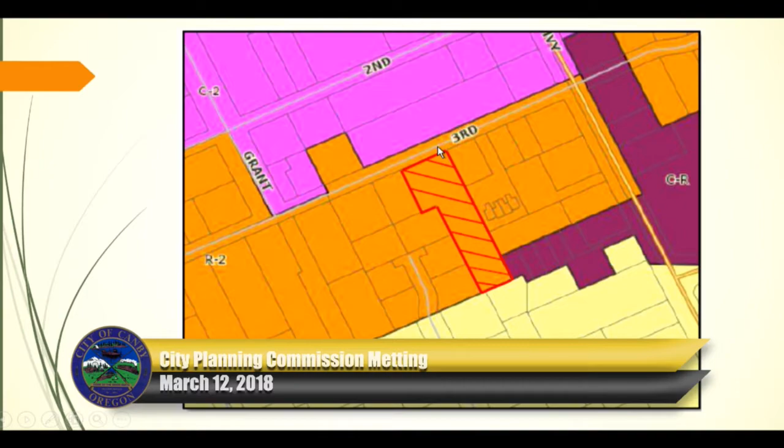This shows the location of the property in the red hatched area. It's 0.74 acres, has frontage on Southwest 3rd Avenue. It's just a short distance, 350 feet or so, from South Ivy Street. The property has a home existing at the front of the property, and so the intent is to develop this R2 zoned property with a higher intensity of use by partitioning off the house.

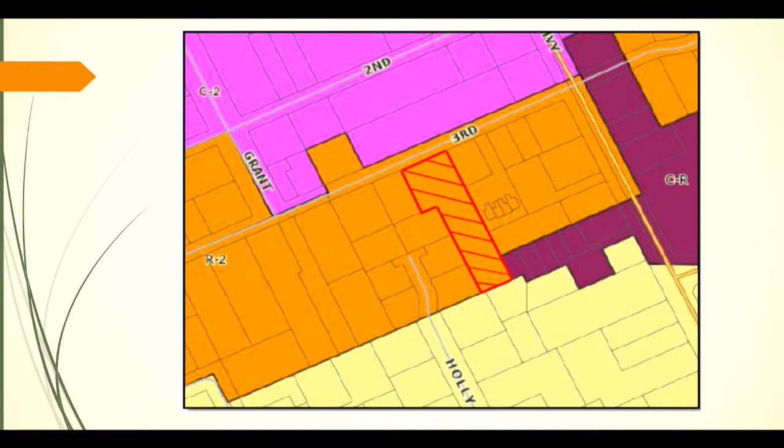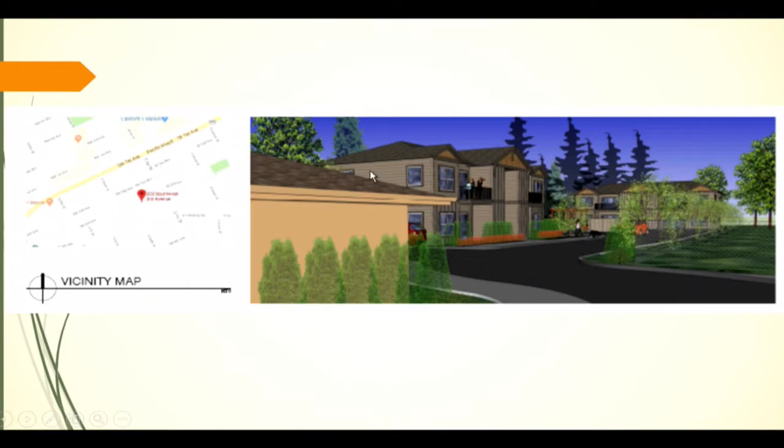Here's a picture of what it's going to look like, but you can see the existing house in the front part here that's showing up. And in the back, there are to be 2 buildings, each a fourplex. I think the front building—I don't remember now—the front building has 1-bedroom apartments and the back building is 2 bedrooms, possibly vice versa. I don't remember now.

They have a total of 13 parking spaces, that's 1 parking space for each bedroom. So you have 4 units in one building, and then 8 units or 8 bedrooms in the other, so there's 12 bedrooms. And then they have 1 visitor parking space, and one of those parking spaces is a designated handicapped space. That is the very minimum ordinance requirement, and so they do meet our ordinance.

It was indicated in the letter from Jennifer Driscoll that they're concerned about the possibility of a lack of parking.

I had a visit with the applicant, because just across the street is the Zoar Lutheran Church parking lot. And over many years, 30 or 40 years, they've actually allowed some of the commercial businesses along Ivy Street to park in part of their parking lot. So it's possible they might make an arrangement with this apartment complex, if need be, to allow some parking in the evenings in their parking lot when it's not being fully utilized.

We have some other evidence that in the evenings the parking along 3rd Avenue is pretty darn tight just from the existing residents that live up and down this street. And so if there are more visitors than we expect, or occupants in these units with more cars than our minimum ordinance requirement, then we always have the fear that they're going to park along the private road and therefore block fire and emergency access.

Reviewing the staff report, you'll find that they've gone through our residential multifamily design matrix, where there are choices for gaining points to help assure a quality development, and staff is satisfied that they've met that point requirement. They've also met the landscaping requirements for the site, and as I mentioned, the fire and trash access and parking are all taken care of.

In the minor partition itself, we do have a standard. This is another concern voiced by the Driscolls, that with this access easement and the sidewalk and the drive going so close to the corner of this existing house, that makes it less desirable than some might think. We do have an ordinance standard that says when you have an existing house and you're trying to work a flag lot to get back behind it to develop it and keep the house intact, your access road should be a minimum of 5 feet from the wall of the house.

And they do have a dimension on this particular map indicating they're 7 foot from the wall to this property line. It's a little less certain how far it is from the corner of this house to the edge of the sidewalk. The ordinance actually says from the edge of the wall of the house to the edge of the drive should be at least 5 feet. It does certainly look like it's at least 5 foot to staff, but it's a close distance.

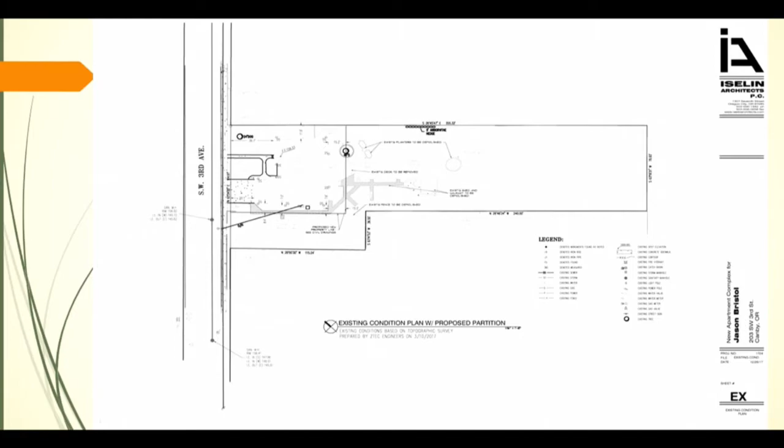Staff did recommend approval of this partition and the associated design review for the 2 quadruplexes, I guess, that are proposed as apartments. And a couple of unique provisions came from the city engineer, 1 through E, listed here.

And we have made one change in the recommendation of condition 1E, by removing a word. I should better look that up here. Removing one word, I think... where is that? Oh, I think I've already removed that from this particular version. I think it's in your... yeah, so it's been removed from the version that I have on the slide here. That's why it confused me.

So on the last sentence of condition E, in your packet, this says overflow route may be required, and we're removing the word 'route.' That was suggested by the applicant's engineer. He explained how drainage plans and standard terminology works, and in this particular case, 'route' was a little too specific to allow them the freedom, given the nature of this site and its drainage, for him to believe he's complying with that. So it leaves the flexibility to take that word out, and we did that. It wasn't harmful, and we checked with our city engineer, who had no problem with doing that.

So I just wanted to let you know that, and we made that change already to our findings that are on tonight's agenda as well.

So basically, you've got the existing driveways needing to be retrofitted for ADA. There's a requirement for commercial thickness to an apartment complex on that driveway, connection with the public street. That's what number A indicates.

They're talking about in C, a relocation of an existing power pole that's going to be needed, and extending the sanitary sewer from a manhole on 3rd into the site.

On condition number 2, we talk about a need, because currently there were no bicycle spaces indicated on the site plan. There's been some discussion about them hanging from the porches. The applicant will satisfy that requirement and it will be a condition of approval that he provides 8 different bike parking spaces in some manner on the site.

We actually did a triplex development on Township Road not too long ago. It started out as 2 triplexes, but ended up a duplex and a triplex. They ended up putting their bike parking spaces in the garages on those units, because they had garages, and we allowed them to do that in that case. A little unusual, but it wasn't really an apartment complex as such. Since they had their own individual garages, we felt that was appropriate to handle in that situation.

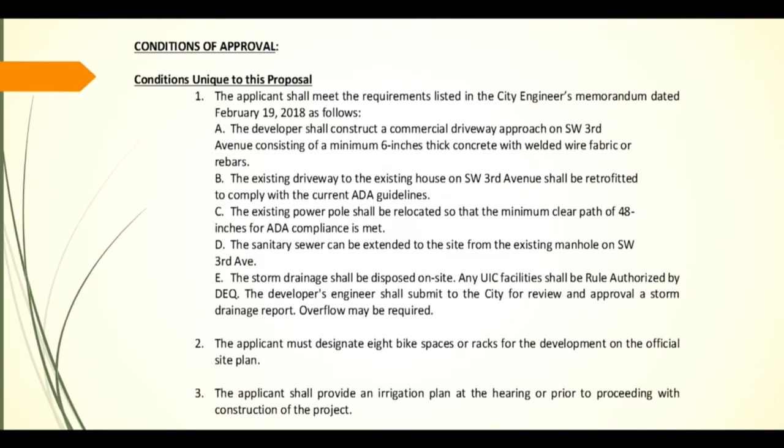We indicated a need on condition 3 for an irrigation plan prior to construction of the project. Staff doesn't actually review the irrigation plans, but we have to review that there is absolute certainty that one will be provided.

That's condition 10 that I was talking about. It's worded openly to make sure that parcel 1 provides an access easement for the road and sidewalk across the southwest corner of it, and to make sure that easement gets shown on the partition plat when it's filed of record.

So with that, again, we recommended approval of this particular application. Do you have any questions?

I've got a couple questions. So Brian, what we're approving today—they still have to come back, right? This is more like approving a concept plan, correct?

No, this is— the next step after this is for them to file a partition plat, and to do that they will file a final plat application with us. That partition plat will be filed of record to make the two separate parcels, and then they will be developing their construction plan set, which will be the final layout for the site. It must follow this preliminary site very closely.

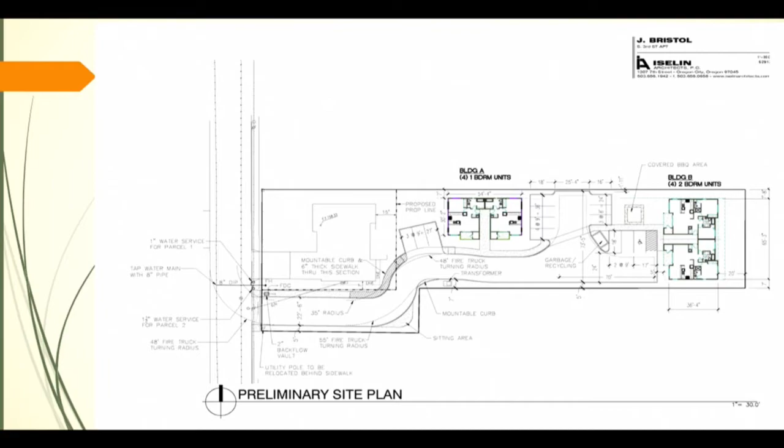This is what you will face when you're trying to develop an area that's otherwise inaccessible by keeping an existing home. Your alternative is to tear the home down, so you don't have this particular situation.

Any other questions? Okay, proponent?

Good evening, I'm Pat Sisul with Sisul Engineering, 375 Portland Avenue, Gladstone. I'll go ahead and introduce Jason as well. Jason Bristol, 21733 South Highway 99E, Canby.

I wanted to begin by discussing the fire truck turning radii. If you look at that plan, there's one turning radius that is 48-foot outside and 28-foot inside. That's the one farther to the right, labeled 48-foot fire truck turning radius—that's a minimum. The other one, where the radius goes up over the sidewalk, has a 35-foot inside radius and a 55-foot outside radius. That's actually larger than is required.

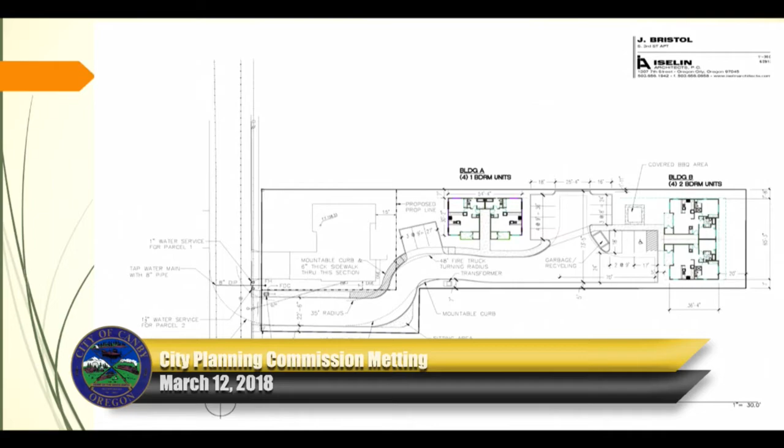So I'm going to turn it over to Jason now, and I'd be happy to answer any questions after he's finished. All right, good evening. I was just going to touch on some of the highlights or features of the development that make it a really nice quality development.

First, exterior finishes: we're doing beveled siding. We also have the board and batten verticals, which we can see on the plans there. We've got arched roofing, pitch 6/12 with gables. We had a requirement of 14 trees; we're proposing 38, so we're really going to make it a great looking green development.

0% of the landscaped area is going to be grass, so it's all shrubs and trees. Everything will be irrigated. We have almost 8,000 square feet of open space. We'll have picnic tables, there's going to be an arbor, and there's also garden boxes so the tenants can actually plant their garden and have flowers or vegetables.

The patios and balconies are all at the front of the buildings. What that'll do is it'll keep the eyes on the access and the common areas. It'll also minimize the impact on the neighboring properties with people sitting or barbecuing and being on top of the neighbors.

The units will be ADA adaptable, both downstairs and upstairs, meaning they can be converted into a residential version of ADA compliance. Building A, the front building, is 1-bedroom, 1-bath units, consisting of 4 units at 733 square feet each. The back building has 2 bedrooms, 2 baths, at about 1,058 square feet each.

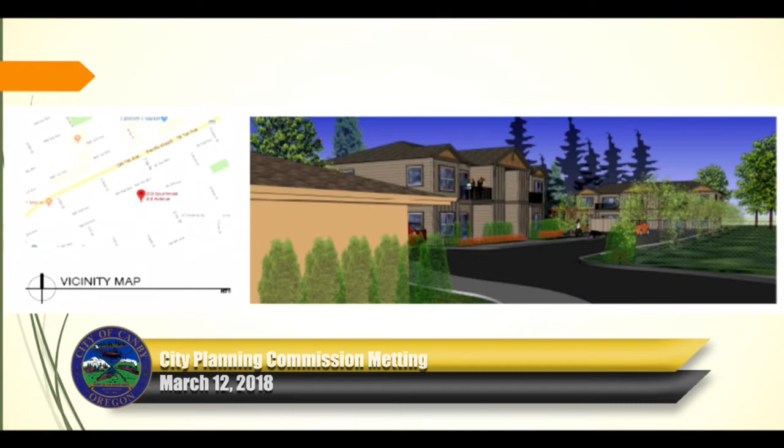The last thing I wanted to mention was on the patios, we also have a storage unit or closet. While it's not necessary, bike parking could go in there hanging, so if somebody wanted to lock their bike up for the winter, that's an option.

Any questions? Any questions? No, I don't think so.

Well, nobody else is here, so I don't think we need opponents, neutral parties or rebuttals. So I'd like to close the public testimony.

Are there any questions by the hearing body? I've got some discussion. Yeah. Okay. We okay to discuss? Okay.

I'm still concerned about the access. I mean, I think you're doing a great job putting in something that I think is very usable for the city of Canby, but I think it is a little bit tight.

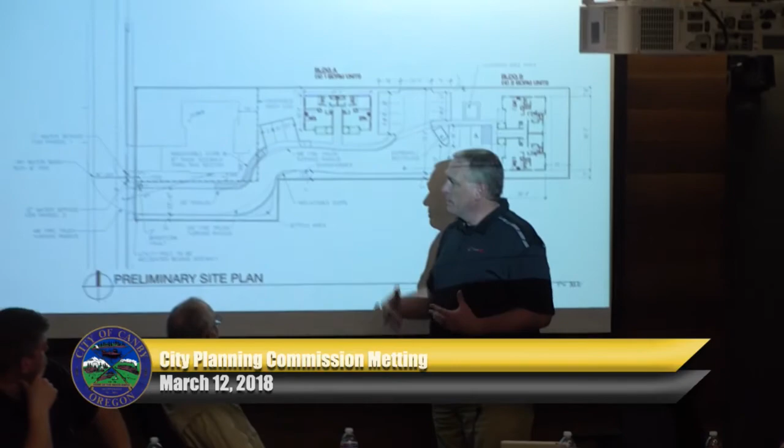My worry is, and if we can go back to that, Brian, I don't know if this is going to be fenced here. Is it probably going to be fenced? My worry is, and I don't know if you've been in an emergency type situation. I have.

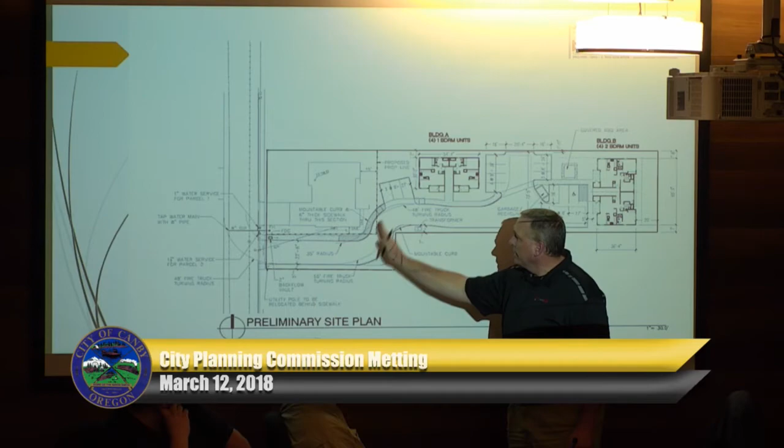If fire does have to come in here to help anybody, every one of these folks are gonna be going right this direction - that's the only way out. And if they're tight in here trying to get in, they're gonna be going right towards the people. So it makes it very difficult in a medical emergency or if there's a fire. It's great that you're putting the fire sprinklers in, but I think you're not allowing people to escape, and you're creating a congestion point that may pose issues from an emergency standpoint. I know we don't plan for those things, but they do happen.

So did we get input at all from Brian, from the fire department on this? Yeah, we sure did - they've accepted this, with accommodations on the radius. That was their issue, being able to have at least that minimum accessibility for their truck itself.

Is this somebody living in this home that doesn't want to move, or you didn't want to develop it fully with apartment type? It's almost 3,000 square feet, and it's a foster care home. Okay.